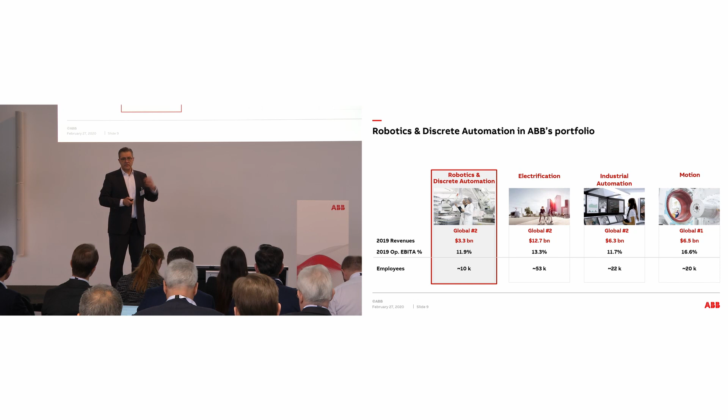And we believe that being close to our customers is really one of the key success factors for how we are driving the business. And I can tell you that when we decided with the new organization, entrepreneurial divisions, last year, I really felt that I have the autonomy to drive the business and have the cost control in my hands. And what I'm trying to do is to bring that authority down to my team, to give them full autonomous decision-making to be able to act according to market speed and not according to corporate speed.

What are the things I would like you to leave with today? First, we act in a highly attractive market that is driven by key dynamics and mega trends that are here to stay. Robotics and automation will be a key driver for prosperity and sustainability over the next decades. I would like you to better understand how we were able to win in the past and how we are planning to capture the next level of growth in our industry. And last but not least, how we are planning to get into the margin corridor and to be well in the 13 to 17% EBITA.

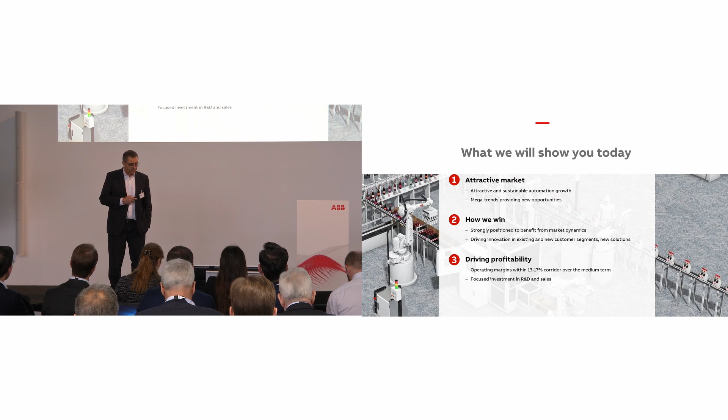Together with Jana Suvanto, after my presentation, let's start with an understanding of what we do as ABB, Robotics and Discrete Automation.

This is the portfolio that we offer to the market. It's the most comprehensive portfolio in the industry. And you can see here a wide range of portfolio elements, from a robot that is able to carry 4 kilograms up to 1,000 kilograms, basically carrying a chassis of a car, but many other applications. And then you see other types of robots that we have brought to the market, collaborative robots like YuMi, and then the picker, which is typically used in food and beverage, picking smaller pieces like bananas or cookies. You'll see applications today. And then the SCARA robot is a high-speed robot that is used in the electronics industry.

In robotics, in a very simple way, there are 2 main applications. One is motion control, a typical example would be painting a car, where you have high precision in what you do. And then there are other applications that we call pick and place. These 2 applications are the ones that drive the applications in our industry. And in both of these applications, you need strong motion control, and our ABB motion control is famous for being the best in the industry.

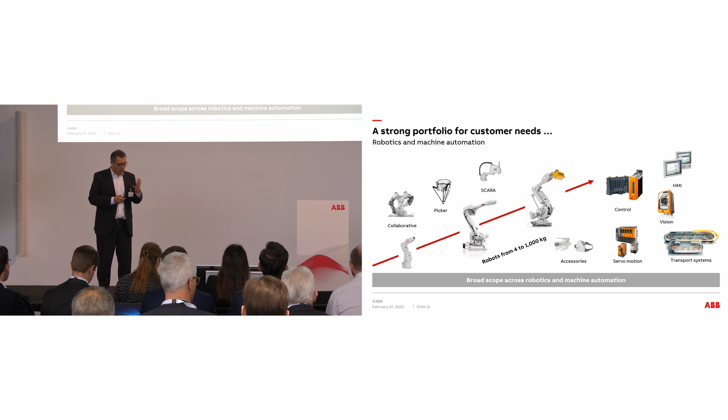Now what we do is we take the robots, as you can see, the end-to-end portfolio that we have. We take the domain expertise that we have, and we use our simulation and software engineering tools to be able to address different application needs. And this is really at the core of what we do as ABB.

A good example is we use our simulation tool, for example, in the electronics industry, where a smartphone manufacturer typically comes in December, January, and says, I want to have a production up and running in May, June, and I would like you to simulate my new device and show me that you're able to produce at a certain takt rate.

You see in the back there other applications where you have 5 or 4 robots collaborating on one specific task, highly complex, and that is only possible because we use software simulation tools to reduce the downtime for the customer, but also to reduce the uncertainty, because we can do that without touching any assets. We do the simulation, and then the software that is created is the runtime software. We take the same software, and that's the one that is really run with a robot.

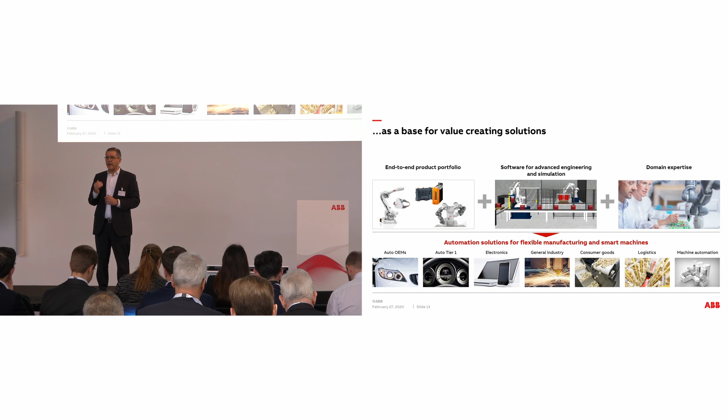And you can see the multiple industries that we are driving, and this is really key for us. We learned in the automotive industry. We learned the cost discipline, we learned the precision, and many other things. And we're using that over the years to enter into new exciting industries like electronics, general industry, consumer, and lately into the high growth industry, logistics and machine automation.

We do that for a purpose for our customers. Productivity was always the #1 requirement from our customers. But I can tell you, over the last year, the number of times a customer told me, I need flexibility without sacrificing productivity. In the past, if you wanted flexibility, you create a new production line. Nobody can afford that anymore.

With all the uncertainty we see, with the trade challenges, with uncertainties in many areas, as we can see just today, flexibility of production is becoming the #1 requirement without sacrificing productivity. And guess what? Robotics and automation is the only solution for flexibility.

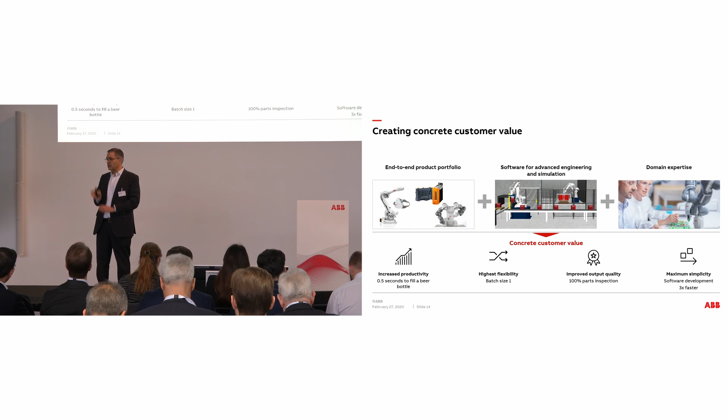We see that, interestingly, not only in the factory, but also on the machinery side. If you have a large machine that is used to produce bottles all the same, you can actually change that pattern if you add robots to the machine. And this is one of the innovations we will show you today with what we call machine-centric robotics.

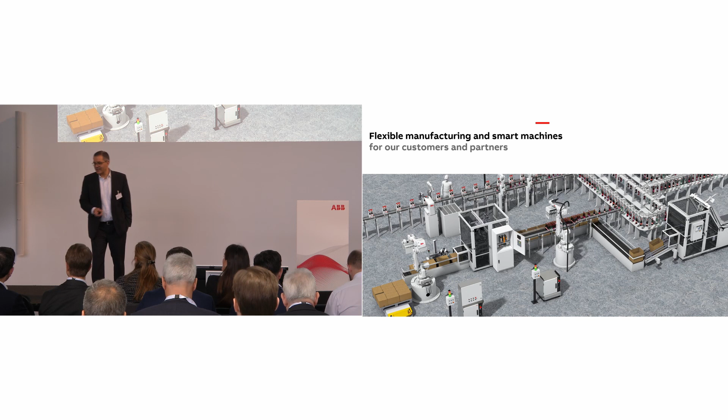Now, because this is so fascinating, we wanted to show you an animation for 2-3 minutes of how today we are able to produce at a higher productivity and show you how the factory of the future is possible. So I would like to ask Yasmin to come with me on stage.

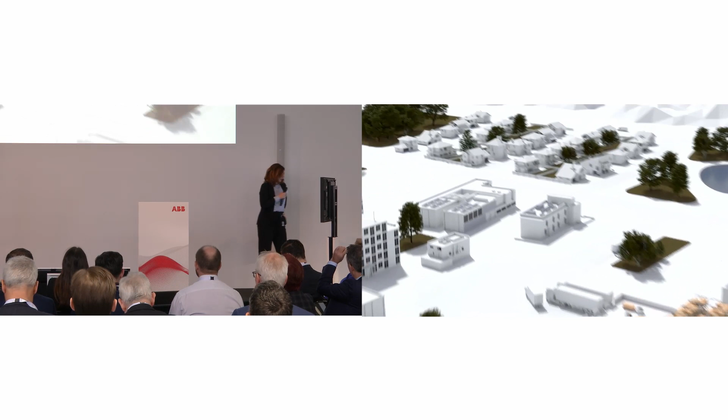Yasmin will now order something. Let me explain what you want to order. Okay, let's see what happens when I click on ordering.

Okay, so I assume I'm sitting on my sofa and I have this iPad in my hand that says I can select what kind of bottle I would like my drink to have. So I would like to go for the green bottle, green for hope. Then I would like it to be with Coke. And for the flavoring, let's say we go with sweet cherry.

Then I can also choose what label it should have on the outside of the bottle, and I think in that case we'll go for the red one. And last but not least, I can also choose how the package looks like, so really what box does it come in. And of course we'd go with the red and gray as an ABB.

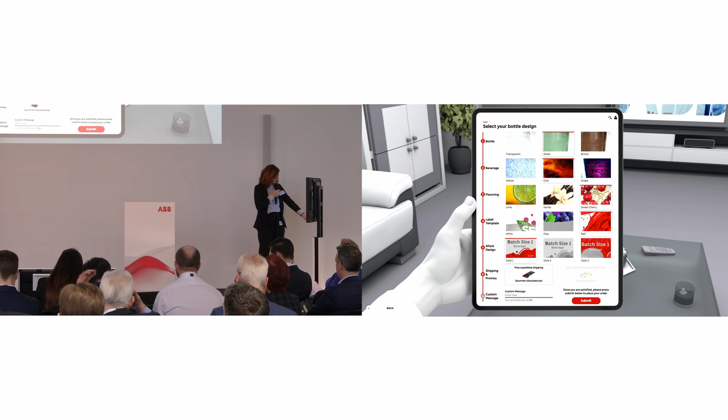Then I do see that for shipping and promos there is an extra chocolate bar that comes with it as a promotional gift. And last but not least, I can enter a message here that comes on the box, and here I would say we go for something like 0 calories, hoping that this would be true when drinking it.

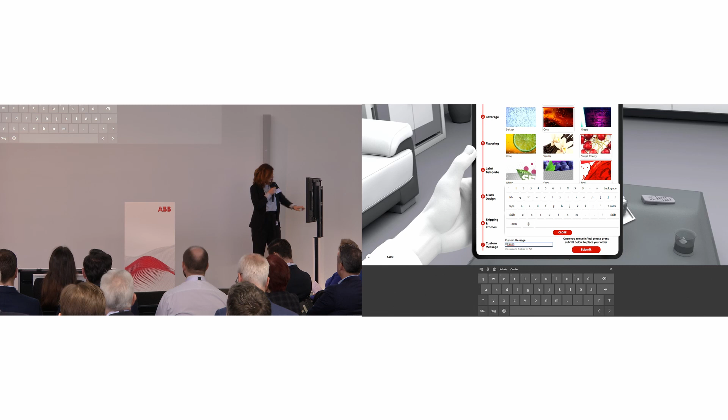Or 0 caroli, because that's what the tool wants me to say. And I'm flexible, just like our solutions. Thank you very much, Yasmin.

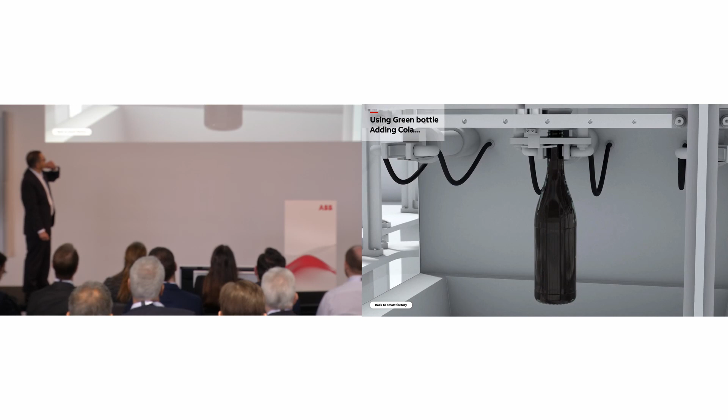So now the order goes to a factory that produces soft drinks. It goes to the MES system. And then you can see a singulation happening. This is the green bottle that Yasmin just ordered. And then you can see it's now filled with the Coke. And this is using our ACOPOStrak technology that singulates out one single bottle.

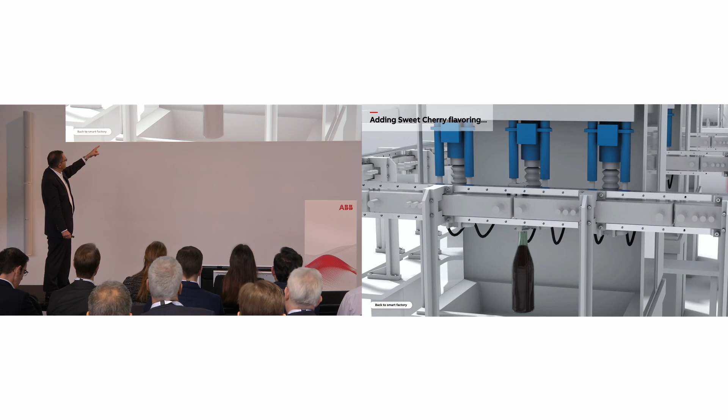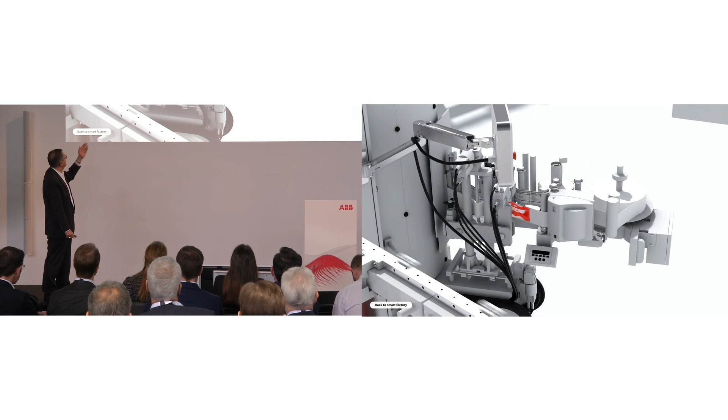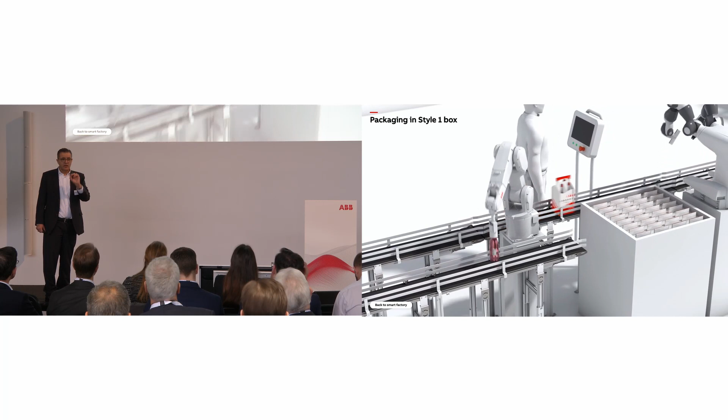And then it gets filled with a cherry flavor. All of that is possible while you're doing mass production, but singulating out. You can see that it goes back to the regular flow, and then it gets labeled with the label that Yasmin has actually ordered. And again, it goes back into the mass production, but it has a separate path. And this is really key, because the trend towards batch size 1 is probably the biggest driver for production today.

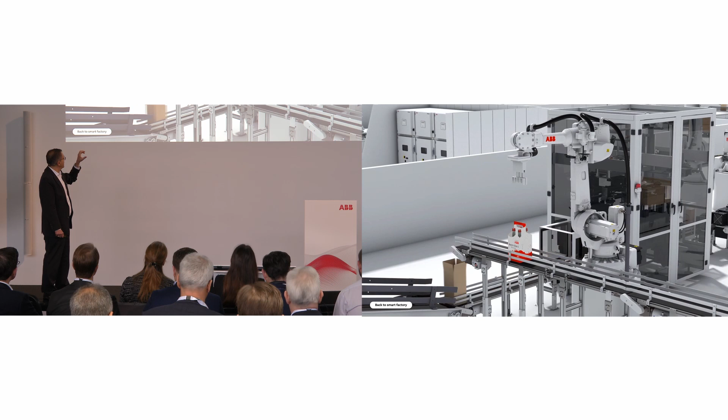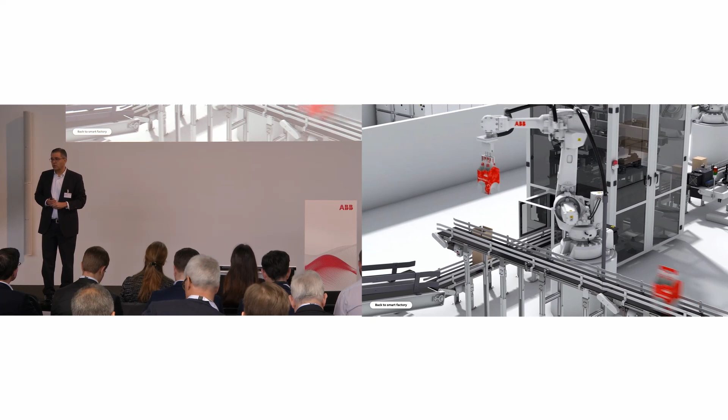And then you see the YuMi putting a special chocolate bar in it, and then it goes to the robot that picks the individual package, puts it in another bag, and it goes basically through its flow. Now, this batch size one is basically what we all do on the weekend. We order on Sunday, we want something to come individualized for us.

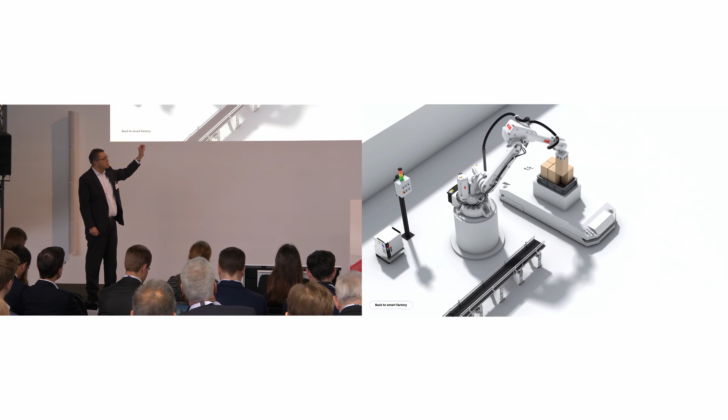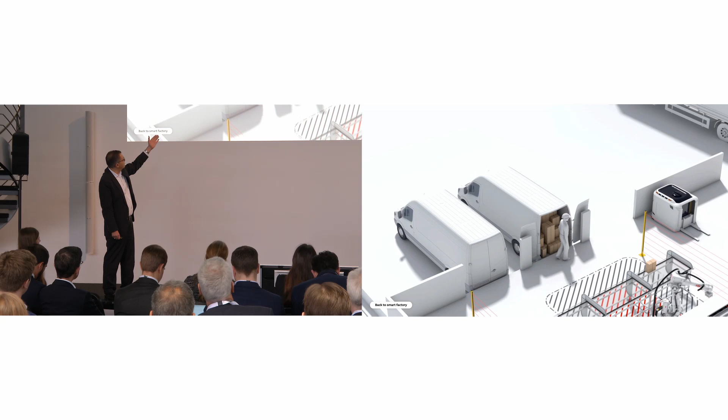Here you see the package going onto an AGV. AGVs are a big trend in our industry because they add flexibility to the production line. The AGV brings it to the worker, and this is our safety concept with collaborative robots. And then you see the employee coming in, taking it, and then it gets delivered to Yasmin, to her home.

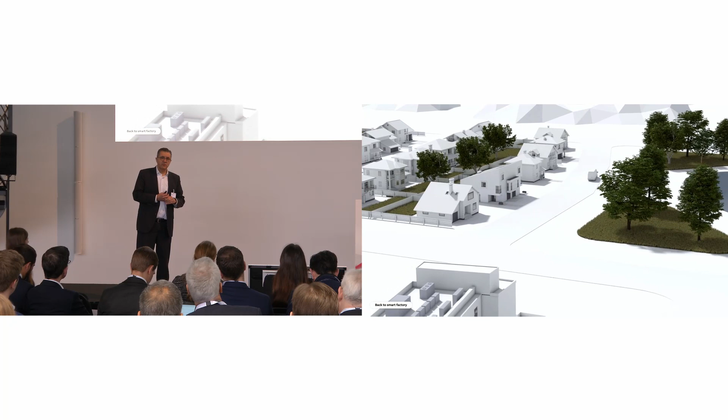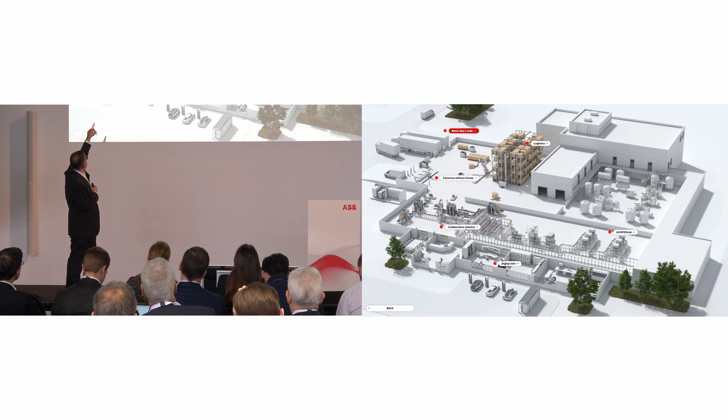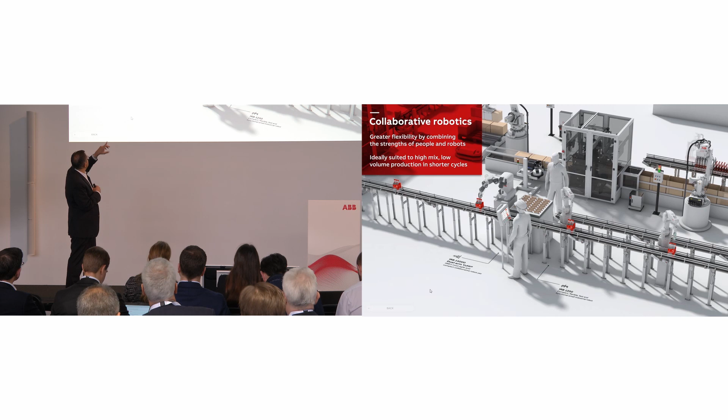Now, I would like to show you just two or three examples of what in detail is happening. One example is the collaborative robotics. Let's zoom into the factory without fences. So here you see the YuMi. We need to take the other one. You see here the YuMi collaborating, which is an inherently safe robot.

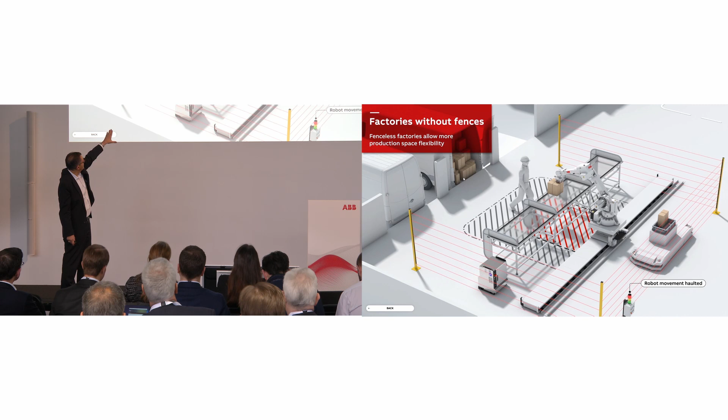But the other example is we want to make all our products collaborative, and that is possible through a new technology we have developed. It's called SafeMove 2. Basically, you see security zones where the employee can go in. As soon as you come into the black zone, it slows down; red zone, it completely stops. When you go out, then it resumes working. And this is a technology that enables all our products to be able to be safe.

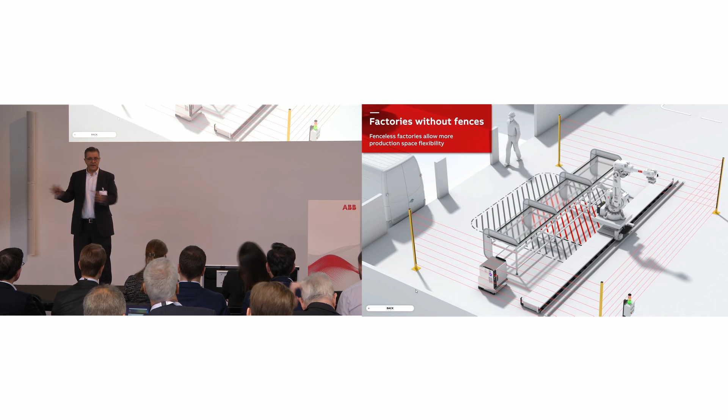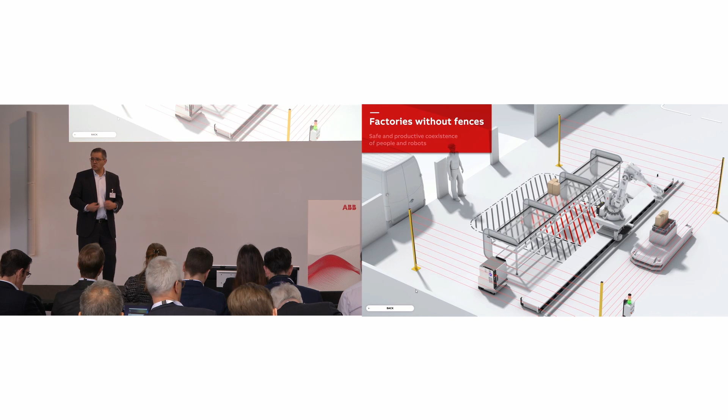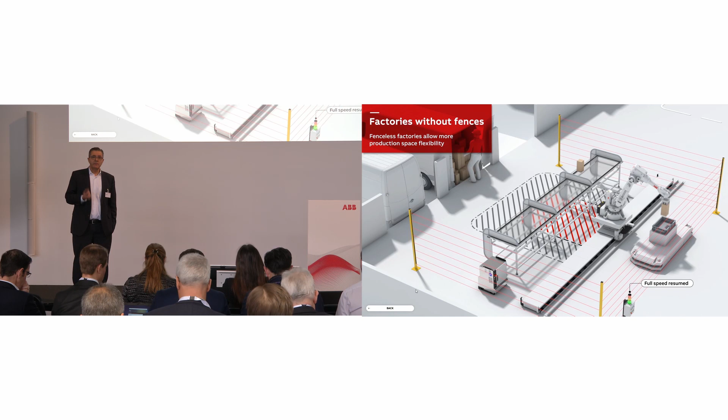And why is that important? Because when you buy a robot, you want to have a robot that carries high weight at a fast speed, or else you don't need a robot. But that contradicts the safety concept. So if you can match these two together—allow the robot to move fast, but when you need to interact with it, you come close, and then when you leave it resumes working—this is the concept that makes all our robots basically be able to be collaborative.

Thank you. So, quite exciting. You'll see examples of these applications today.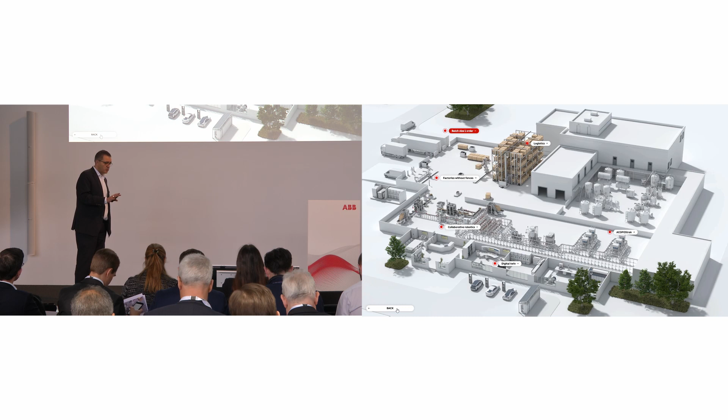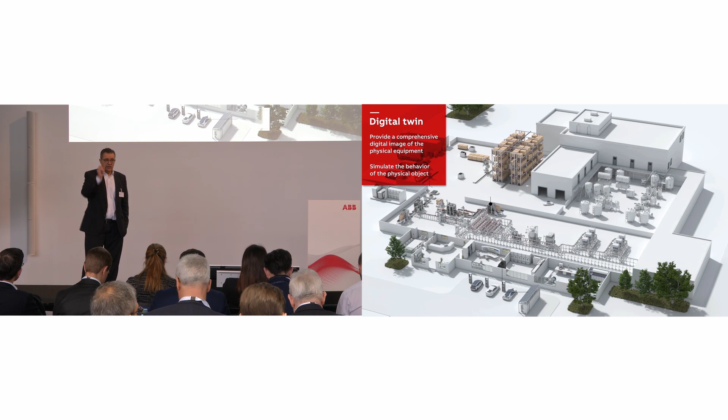This is the factory of the future, and all our robots here are actually connected. When you buy an ABB robot, you'll see in a moment, the robot gets connected and has its own IP address, and it says, hello, I'm here, I can be monitored. And then we can monitor—we have a center in India, in Bangalore, where we do analytics, and we can offer the customer prediction of what is going to happen to the robot, if it's going to fail, but we can also optimize the flow and the uptime for our customers. Today we have more than 9,000 robots connected, and the number is increasing rapidly. The more robots we have connected, the more we learn with our algorithms how to optimize the robots.

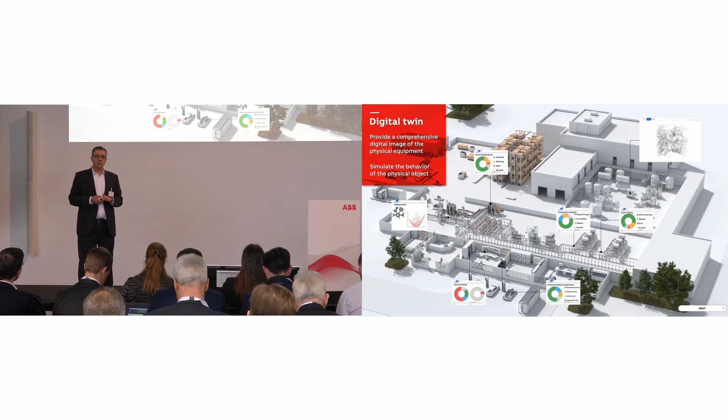We sell robots separately, but we also add value by driving modular cells. And this is a key concept. You see examples back there—there's an example there of what we call machine tending. It's basically a robot feeding CNC machines. This is an acquisition we had about three years ago. And what we do is we create repetitive modular cells, standardized.

So it solved the solution for a customer, but for us, by making it repetitive, we enjoy also a healthy margin in it. And then we can go up to the next level, which is we can provide a complete system to a customer. And this is key for us because all of the learning that we have in the value add, we bring back to our products and software. And the same applications we use in the B&R model. So this is really a key concept for us: robots, the software, and then we have the cell that we repeat and we standardize, and then we go up to the next level and we do systems.

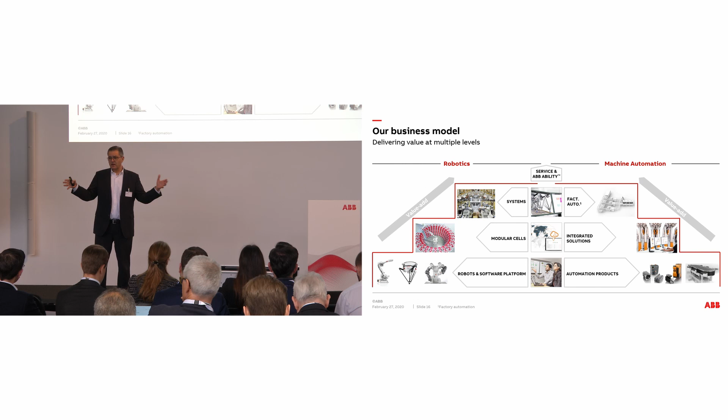We do systems mainly in the logistics area. We'll hear examples today from Marc Segura. We also do systems mainly in automotive—for example, a paint system or a body-in-white, which is basically chassis assembly and so on. Now, this is key, and this is how we are going to drive robotics in the future.

We're strong always in the automotive, from our product side, but also on the system side. But we've decided to create new segments that drive attention on other industries that are high growth industries. Now, automotive tier, you might think, is similar to automotive, but no, the level of automation there is much lower than in the automotive OEMs. That's why there's big potential in auto tier as much as there was in auto OEM.

Automotive is an account-driven business. That means we do directly the business with the end customer. General industry, we use also distributors and system integrators. It's a different concept. And if you focus too much on the big, large orders in automotive, you might tend to neglect the smaller customers, who, by the way, are highly profitable because there is a high attachment rate of service as well.

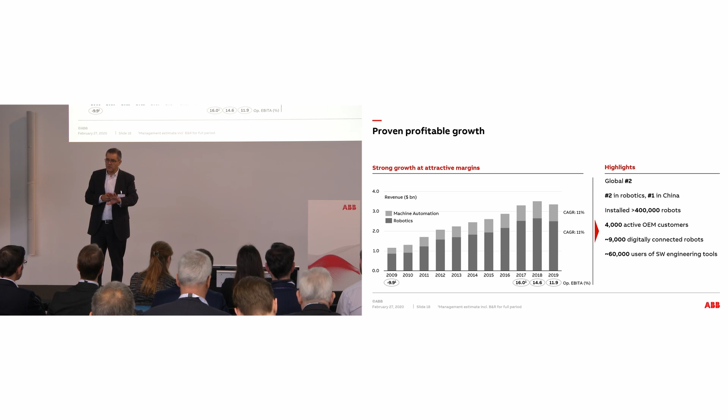Now, what happened over the last 2 years, I would like to go through with you in more details. So over the last 2 years, in 2017, we had what I would call a peak in orders from the electronics industry and the automotive. We had times where the ordering of the gearbox was taking more than 6 months. You had to actually build capacity for 6 months to be able to deliver. So that was a peak on both sides.

And then we had the drop in both electronics and in automotive industry. And then we had a switch in the mix, because we were still holding up quite well against our competitors, because we didn't drop in our orders, but that was mainly systems business, and the system business obviously has a lower gross margin than the rest. And then in 2019, we had a drop in the service business, also mainly driven by the automotive, where the capacity load of the factories was getting down, and that's why the ordering of spare parts and service was driven down. That is what happened over the last 2 years.

We are committed to be well in the margin range with multiple actions that we have in place. Cost management, we already started in 2018 when we saw the market declining. That's why we kept a certain level of profitability. Mix and value pricing, you'll hear more later from Jana, the CFO. And then quality and execution is a key focus for us.

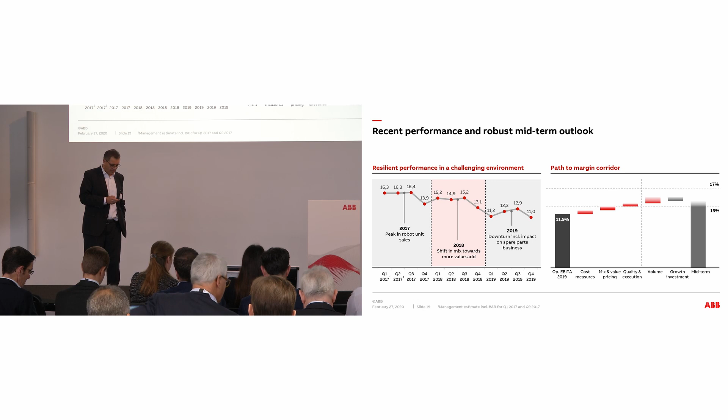I mentioned before we were resilient compared to our peers for multiple reasons. One of the reasons is we have a good mix between products, service, and systems.

This is certainly one. We are well positioned in China. We are #1 in China with more than 2,000 employees. But we are less vertically integrated, and that gives us room in downturns to react much faster.

You can see that on the top line, we hold it up well. So we actually regained market share amongst our large peers over the last 6 quarters. And also on the profitability side, we went down, but we were more resilient than the rest of the industry.

Now, it's an attractive market, and it's a really exciting place to be in for multiple reasons. I spoke about the individualized product. This is really driving demand in consumers' business, in automotive, and many others.

Labor shortage is, wherever I go worldwide, really one of the most pressing arguments that I hear. Even if you look at logistics, our e-commerce partners have to hire hundreds of thousands of people to cope with Black Fridays and the peak demand, and then go down. This is not sustainable, and you see the growth rates. That's why logistics is a growth place for us, but in many other areas as well.

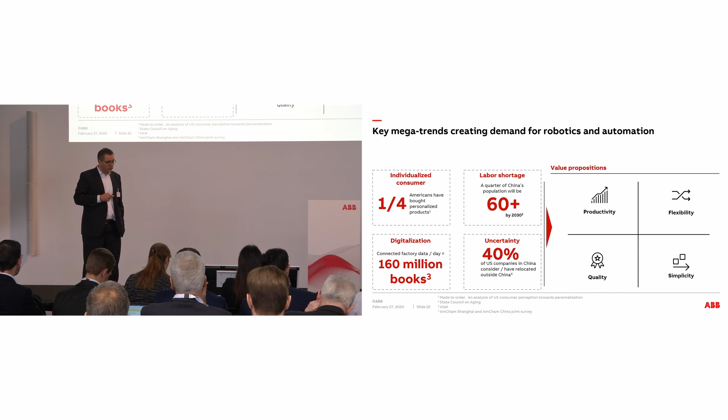That is really the key driver for the mega trends. And what is also important to know is that the cycle of our customers' business is very different. As I mentioned before, probably automotive was the key driver for automation over the last decades, no doubt about it. But Tier 1 has a much lower level of automation, and they will raise up because productivity for them is absolutely key.

But in automotive itself, even there, we are the leader in electric vehicle manufacturing, battery manufacturing. You'll hear from Mike Larson later how even in automotive there are opportunities to grow.

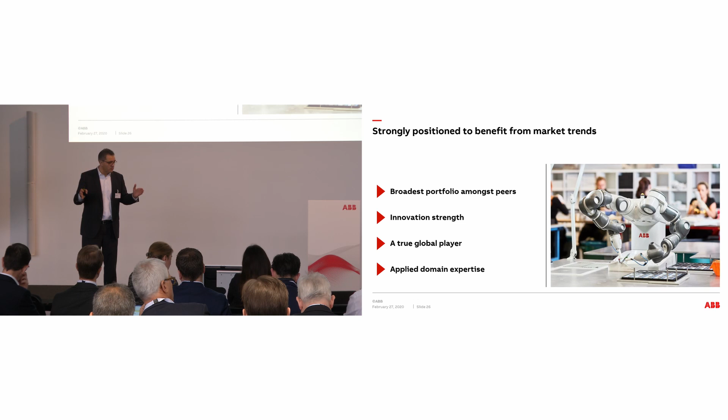And this center here is a good example for that. When we have customers here that need support, robots need support. When we deliver to our customer, it is the core of production, and robots are becoming more core over the next years. If you have a production with a robot, you don't want this to be down. So service is important, proximity is important, and then the applied domain expertise that I mentioned.

Now, we have a very strong and broad portfolio because amongst our peers, there are the ones who have actually robot suppliers, then we have the ones who have the system and engineered solutions and service, and then we have the other part which is based on PLCs and control. With the acquisition of B&R, we have both, and we can leverage the strength of both portfolio elements.

A great example is the machine-centric robotics that you will see today, how when you bring two technologies together, you have a machine, you put robots on, you reduce the complexity by, for example, not using two systems to control the machine and the robot. We eliminated one complete system, so we use the B&R system to control the machine and all the robots on it. This reduces complexity, reduces cost, and implementation for our customers.

We've shown over the last years that we are able to innovate and reduce the dependency on automotive. Not that we don't want to do business in automotive, we want to do business in automotive, but to have a better balance and greater footing in other areas.

We acquired B&R, and we introduced new engineering tools and software tools, and then with our incubation concept, which is really quite a strong concept, we create a small team, we let them interact with a lead customer, and then when that grows, we actually introduce it to the market.

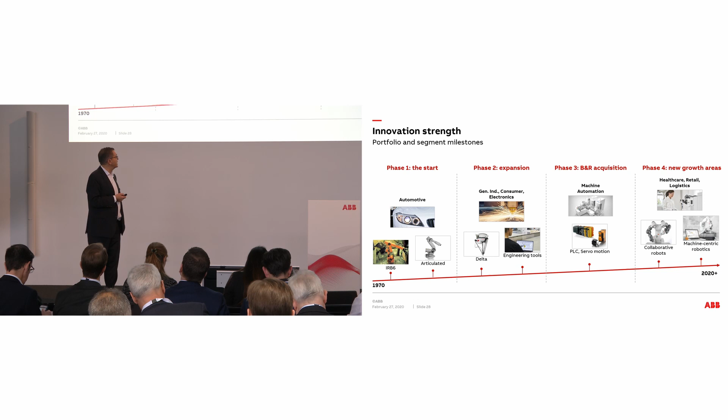But we don't stop here. We believe that innovation is key in our industry. On the collaborative robotics side, maybe because we had a strong focus on large lot orders in automotive, we a little bit neglected that business, but we recognize that, and we will come up now with a series of products in that industry.

We believe that the collaborative robot world is based on two things. One is inherently safe robots, like the YuMi you might have seen—you can touch it, you can see it stops. But you have other types of robots where customers need high payload and speed. In these cases, we introduced a new technology called SafeMove 2, where you enter the zone of the robot, and then it slows down, and then you go out. That's another concept for collaborative robotics, and you'll see a series of products coming out soon.

We have our own innovation center for artificial intelligence in San Jose, but we do something very unique. We invite every year, in what we call an innovation challenge, startups to solve a very specific problem. So we picked a very hard problem for last year, which is what we call bin picking. We gave startups a bag full of stuff—Haribo, bottles, and what have you—and said we would like you to solve the problem of picking them without human intervention.

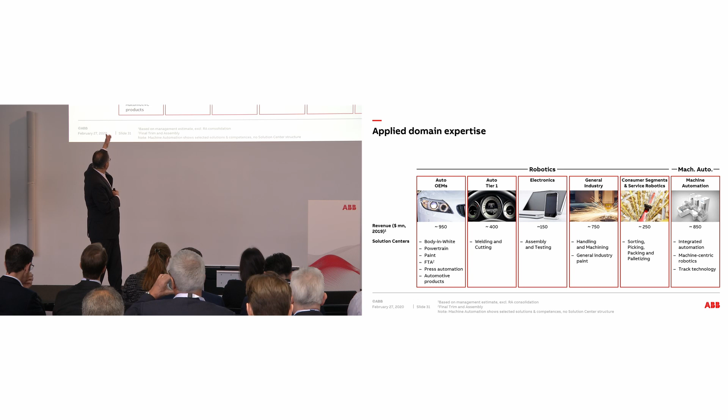They do, basically, a center for understanding how you pick and place in a sorting environment, an e-commerce environment. And then we have the welding and cutting, assembly, and many solution centers traditionally in the automotive industry. That is one of our key strengths.

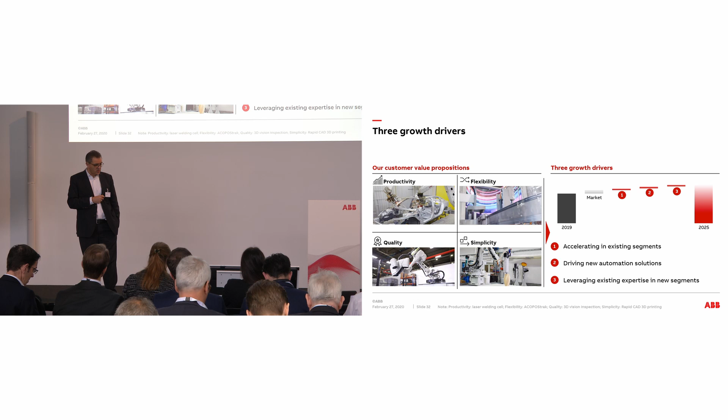Now, our goal is to grow by 3 levers. Market will continue to grow, as I showed you before, but our goal is to accelerate growth in existing segments, drive new automation solutions, and leverage existing expertise in new segments. You will see examples today from our colleagues in the automotive industry, because we believe in the automotive industry, and it's quite an exciting business as well. We'll see examples for electric vehicle manufacturing, and what I just mentioned before, the flexible, scalable manufacturing system, going away from the fixed line to connected lines with cells.

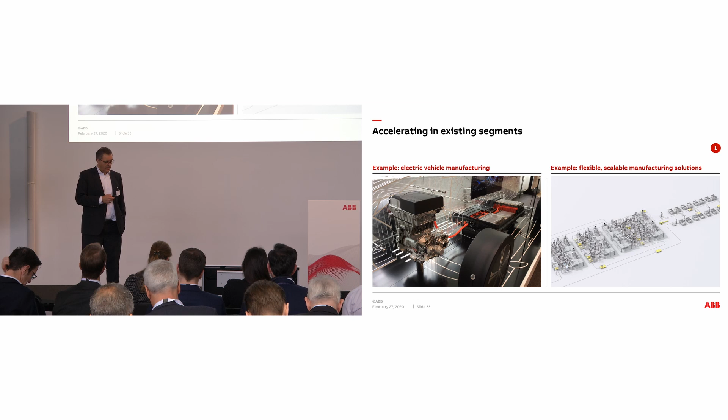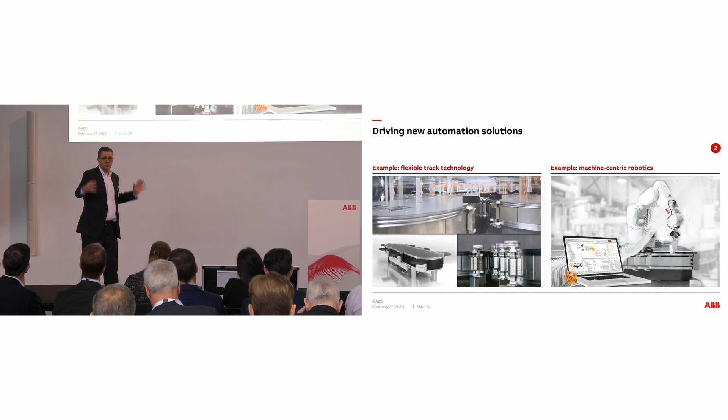This is one example when you go on the tour today. From our B&R colleagues, you will see flexible track technology examples over there, and then the unique offering that we have, machine-centric robots, a machine with a robot on it. And then, from our innovation colleagues, Marc Segura will show you one example of robotized warehouse solutions, which is really a booming market for us, and another example from the healthcare business.

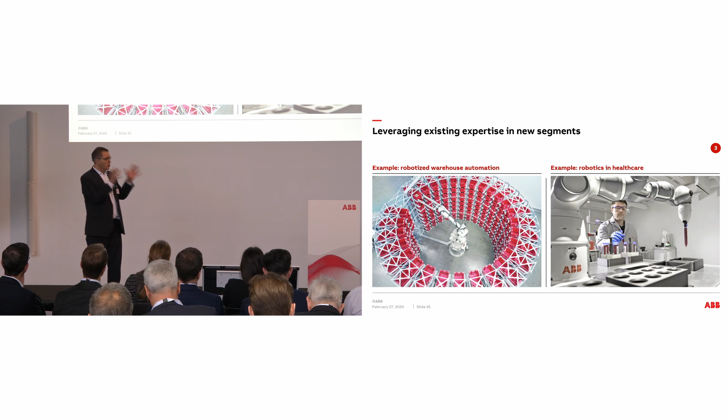So we picked for you examples, one in an industry that is more traditional, but even in this industry, automotive, we see innovation. B&R in the machinery automation side, but also to let you know about all the things we're doing for the high growth areas. All of these segments need dedicated strategies that are different, and this is the key enabler for us to capture the growth in these industries.

I believe personally, having been in research and development for many years, that you cannot do everything on your own. We are proud to be the innovation leader, but we believe also that you need an ecosystem to build upon. There are many tasks that outside are solved by others at MIT, or in Hong Kong, or in Shanghai, and why not partner with these universities? Why not partner with the startups?

A good example is Microsoft. We work very closely with Microsoft on the platform for our ABB Ability, the digital platform. We work with Covariant on the AI side, with Dassault on the simulation tool and the PLM side. And I think this is really core of our strategies, to leverage that strength to be able to drive innovations and growth in our organization.

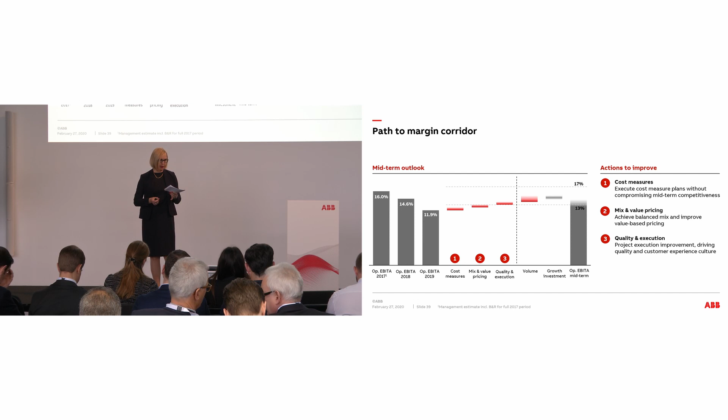We are strengthening our quality and execution in everything we do, including project execution, which will improve the gross margin. This is independent of growth. Of course, we will drive above-market growth, and we will balance our growth investments against the growth opportunities.

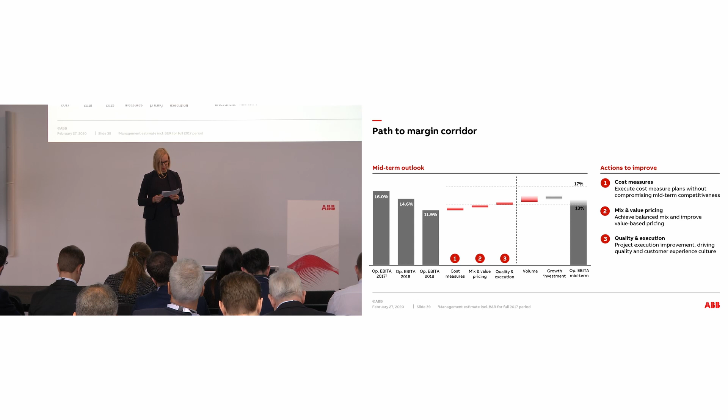Let me give you my perspective on the ABB operating system. Many of you asked these questions last night, also how do I feel about it. First of all, it is the biggest change I have seen in ABB. Why? Because now businesses are truly empowered to drive performance.

For example, we have differentiated KPIs that let us drive performance and value creation, and we have all the tools now to manage our business end-to-end. Business line managers and platform leaders are now fully accountable for delivering results. I also think speed is crucial - we want to be winners in the market and make fast decisions, and this is now possible compared to a few years ago.

Previously you needed several approvals to get things moving. Now we can make decisions fast, whether it's a price decision, investment decision, or cost measure decision. That's really super critical.

I think accountability is key - we have clear roles and responsibilities defined for corporate and businesses. Like Sami said, we have more of the cost base under our control, so we can further optimize and drive costs down. We also lead in 8 countries as a business, meaning fiduciary and legal duties are part of our team, so we can optimize them going forward. This is a big positive and enables our new setup as an RA business going forward.

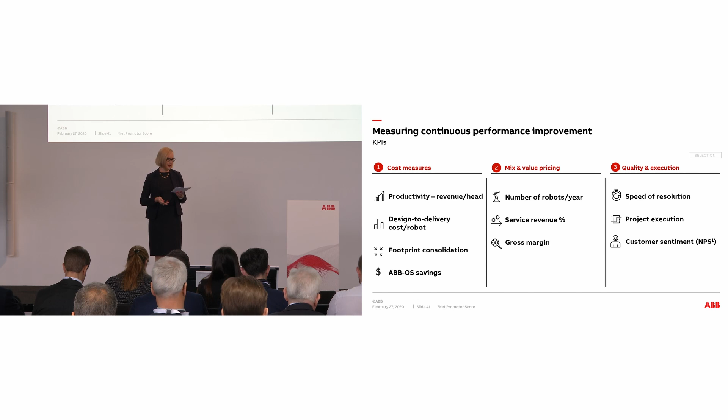Then in quality and execution, an example is project improvements, which has a gross margin impact. Each of the business lines and platforms has these KPIs selectively embedded into their scorecards, and they are responsible for driving those going forward.

So let me come back to the growth. You heard from Sami earlier how we are winning. We have the most comprehensive portfolio in the market. No one else has that. And we constantly meet customers who are truly excited about our robotics and machine automation portfolio, and are happy that we are selling those.

But there are 5 areas that will give us an edge to the growth. First, selling existing portfolio to the existing customers we have very good relationships with. Secondly, accelerate growth in new segments and new markets. Thirdly, deliver scalable solutions to meet customer needs. You'll hear examples from business line heads later today in the kiosk sessions. We also want to accelerate ABB Ability, digital service offerings, and continue investments in sales and execution. Putting all this together, I'm confident we can drive above-market growth.

So what does that mean for investments? We want to invest where it matters, driving long-term growth, not compromising short-term. For R&D, we plan to invest about 5% per annum, investing through the cycle, and this is super important for this business. You'll see great examples today, and I'm really proud of what we've done as a team, in the kiosk sessions.

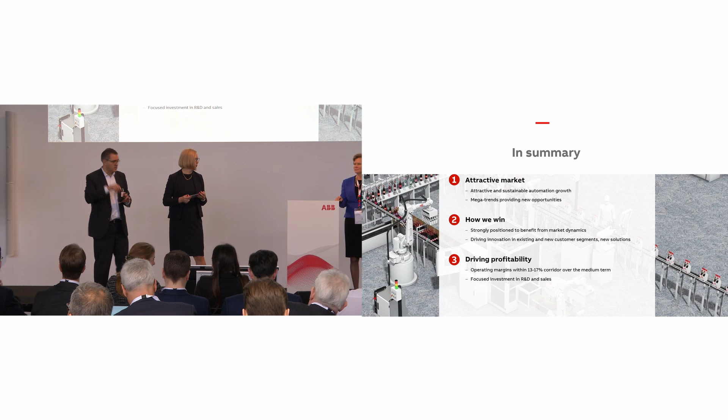For that, I would like to stop here and then ask Jessica to join us, and then we'll open up for questions. We will also have a longer session later after you've had the chance to go through the kiosk and the tour.

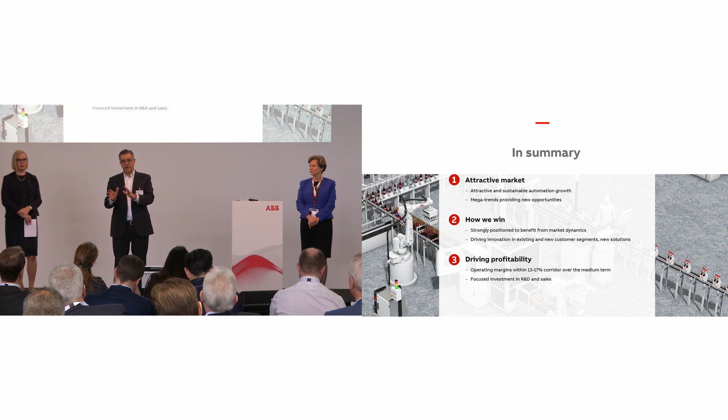Just thinking about the push into the other segments, clearly there's some investment needed, and how much of that have you already done? How much is there to come? And then how do you balance that with your largest market probably being in a downturn for, as you said, the next few quarters at least? Do you still go ahead with that investment, or do you have to manage the margin overall for the division and think about slowing that down?

It's a good question, because I see the faces of my team, because we have a constant challenge internally, who gets how much. But we have a very simple way of deciding: it's the business case. If you have a good business case, you can go ahead and ask for the money to invest. Interestingly, we are continuing to invest in automotive, because we have opportunities to go there. But proportionally the size of the business, the investment we're doing in logistics is higher, because the growth rates there are really quite high, and the demand from our customers is quite high. So you saw the investment we're doing in medical. That's a dedicated investment, because we believe that's going to be a growth area.

When we decided 3 years ago to create an incubator, what we usually do is take about 10 people. We did that in the UK. We put a team together, and I said, you work with 1 or 2 lead customers, and you get the freedom to act. We don't even interfere. You get the standard robots, you build, and then you run. That's an investment, and we try to keep them closer to me and not buried in the organization, because then you basically lose the traction, since our operations always trumps. When they become big enough, we make them a division. Like now Marc Segura is heading it - that used to be a small incubator, and now it's a 3-digit million number. So we constantly weigh out the investments, and I think B&R gets a big investment now because we believe in that growth. We've been showing an 11% growth over the last years, and we believe they can continue doing that.

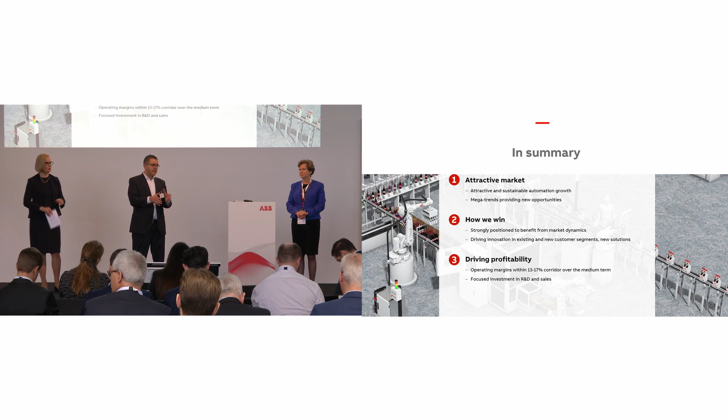Okay, so we had quite some good freedom to act in the past, and I expect that to continue. In robotics and automation we have a very good track record integrating companies we buy. SVIA is a good example from 3 years ago, quite a successful acquisition. We tend to acquire smaller companies that add technological edge to us, and then we standardize and expand - that's what we did with SVIA. But we have another strategy, which is investing where we have system-level integration capability. The example is Intrion, the company I mentioned, 200 employees in Belgium, that we are using as a hub in logistics. When we started in logistics it was a small team, and then we said we need to really leverage scale. So we bought this company, and now it's the hub for all Europe for logistics projects. We will continue to develop this strategy as we go, and we are very confident that corporate will support us with our strategy there.

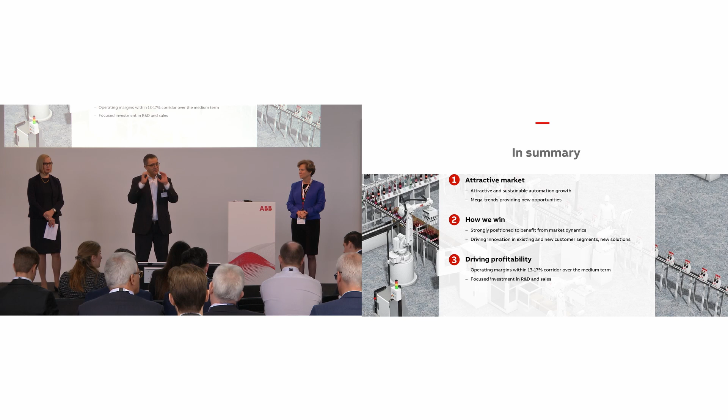Yeah, good. I mean, the regional aspect is part of that - you can see that from Intrion. It's always a mixture between the industries we are trying to get into; logistics is a good example. And the regional footprint matters too, because to your point, you're right, we need to be local - the system integration capability is usually a local competence. Like the Intrion example, that's a European solution for us.